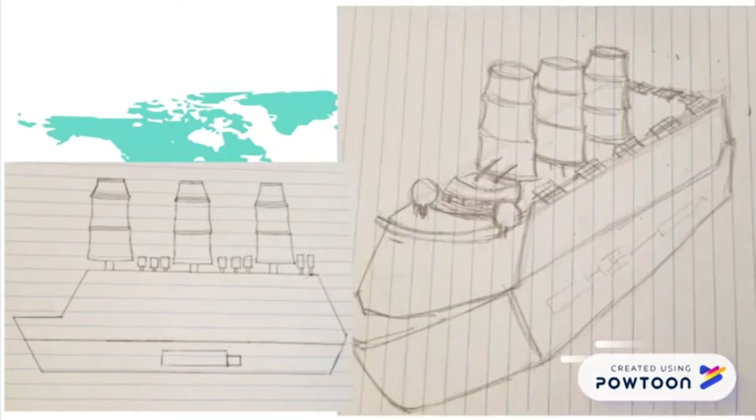Solar energy, wind power, and biofuel are more likely to replace the heavy fuel oil in cruises. As wind and sunlight can be obtained from nature during the journey, electricity can be generated by wind turbines while solar energy can be stored in a photovoltaic system.

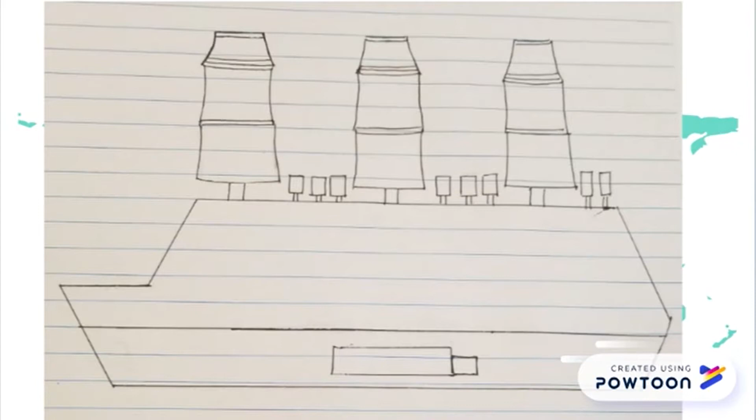And the first one is wind energy. We do not use the wind energy to convert into electricity - we directly use the wind direction to produce thrust.

This is a design similar to the B9 cargo ships that use a 20 meter by 50 meter high rig system to maximize the wind power to produce propulsion. This is designed by the University of Tokyo and invested in by merchants and some potential investors, which is also proved by experts and professionals about its efficiency and incentives.

Furthermore, it also proves our installation of the rig system using wind energy. As our design is taking reference from the B9 cargo ships, we should examine our design by calculating some data. The average capacity of the B9 cargo ships is about 200,000 to 300,000 tons.

Also, for the common cruise, the average capacity is about 220,000 tons. So in conclusion, the wind energy of the cargo ships can be applied to our RE 1.0 cruise.

With 80,000 gallons of average consumption per day, as we know, 60% of energy is covered by the wind power. So if we calculate the oil saved per day for ships, we get the answer of 48,000 gallons.

And there are totally 314 cruises in the world, and we can assume there are 20 cruises operating a day. So if we calculate the total amount of oil saved per day, we get 960,000 gallons, which is a very massive number.

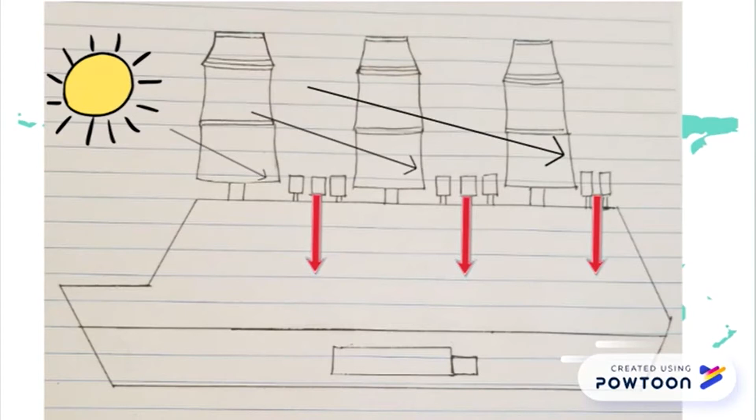We would also like to apply solar energy to our design. In daytime, the solar energy is converted into electricity and stored in batteries. At night, we can directly use the electrical energy stored in daytime to support the ship operation.

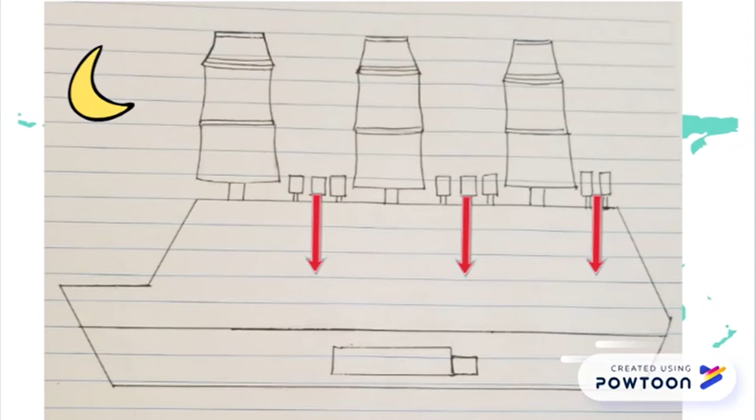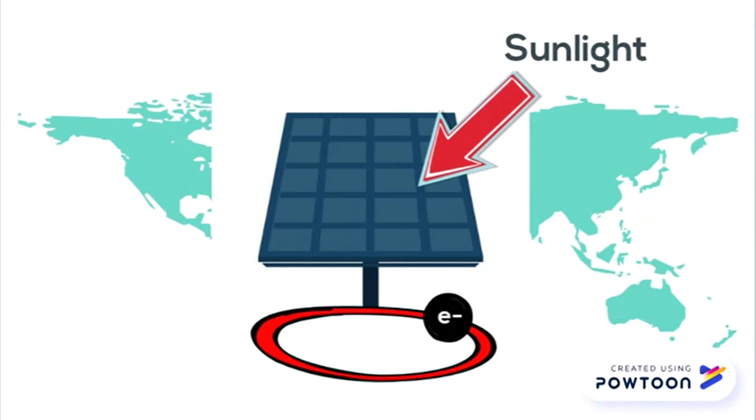You may ask, how do solar panels work? When sunlight shines on the panel, electrons are emitted, resulting in the photoelectric effect.

Now let's move on to the data of efficiency of solar panels. At mid-20th century, only 4 to 6% of solar energy is converted to electrical energy. So what is the electricity demand of cruise? We find that the power for supporting the whole cruise is 60 to 70 megawatts. 1/3 is used for propulsion, and the remaining is for other usage, which is 40 to 47 megawatts.

But what is the amount of solar panels we need actually? A general size of solar panels is 1.635 meters square, with a solar constant of 1.36. The energy demanded of cruises is 40 to 47 megawatts.

By applying this equation, we can see that a total of 78,250 solar panels are required, and it is not feasible for us to install all standard solar panels on the roof.

In economic aspect, the cost of solar panels per watt is $17.203. Hence, the total installation cost will be more than 700 million, which is impossible for us to afford.

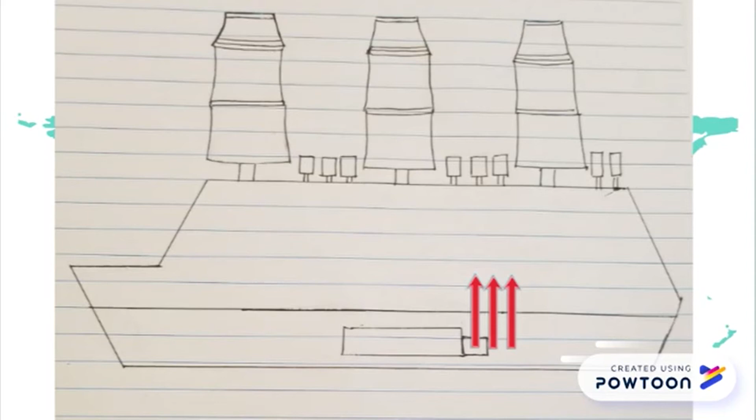Generally, we get 40% of the ingredients we turn into the waste, and we get the huge number of passengers and also the many places for serving the dish. The massive food waste is produced, which refers to it has a great potential to generate biogas.

So what is the relation between the food waste and the biogas? How is biogas generated from the food waste? First, we have to prepare some input materials and do the fermentation, which consists of the following 4 processes.

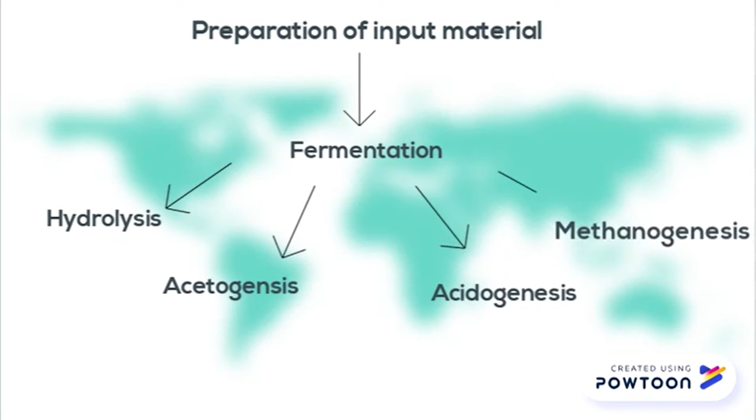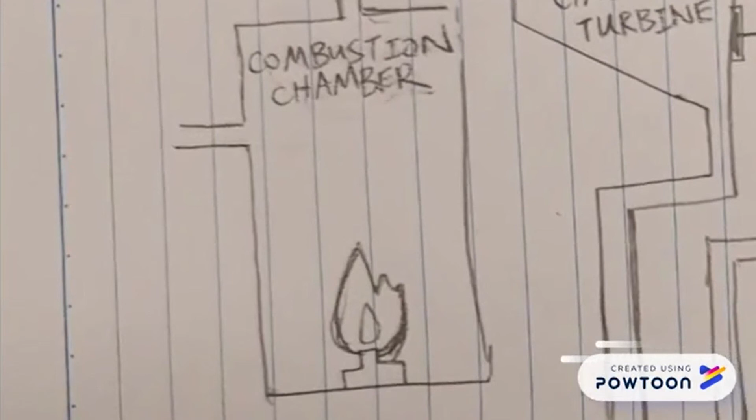Then, how is biogas related to electricity? What is the efficiency? First, when we go to the combustion chamber, the first step is pumping in some biogas. Then, by heating the gas, it can raise the molecular kinetics.

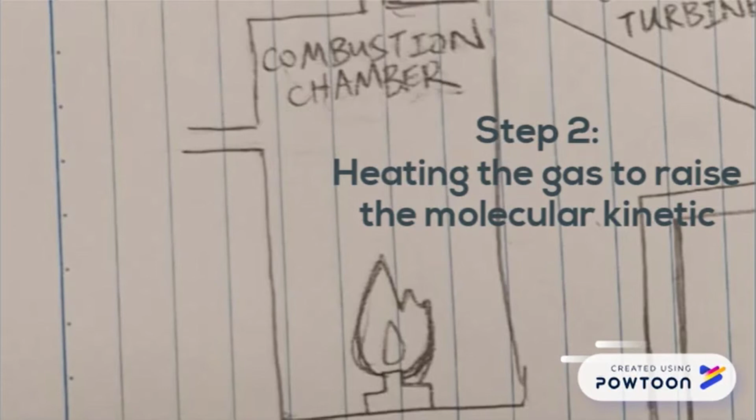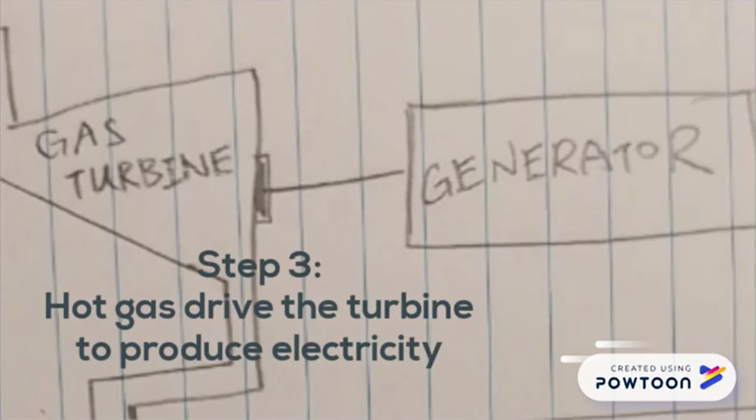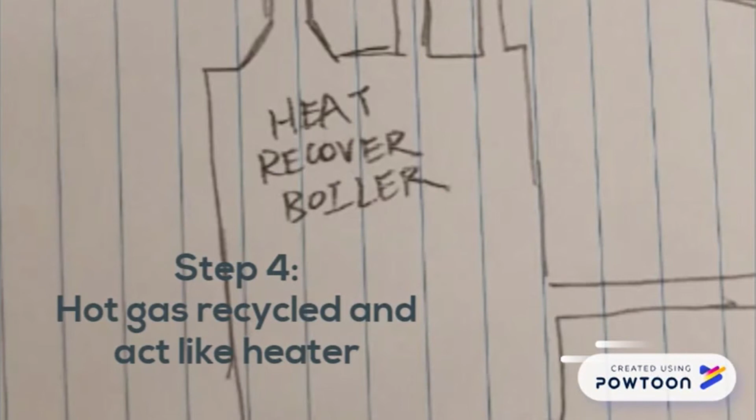The third step is the hot gas driving the turbine to produce kinetic energy, which converts into electricity. The fourth step is the hot gas, which is recycled and acts like a heater heating the water.

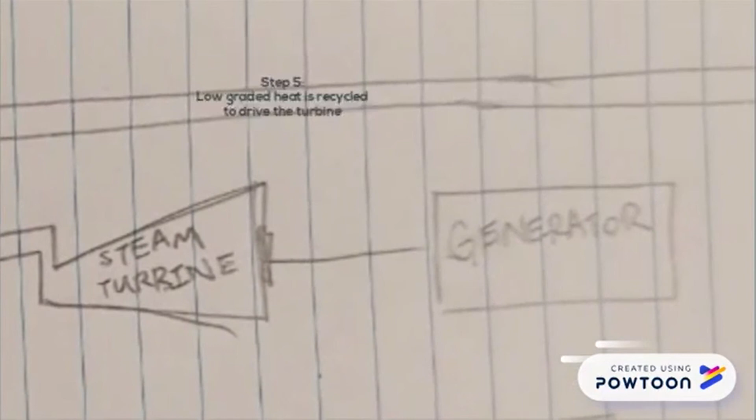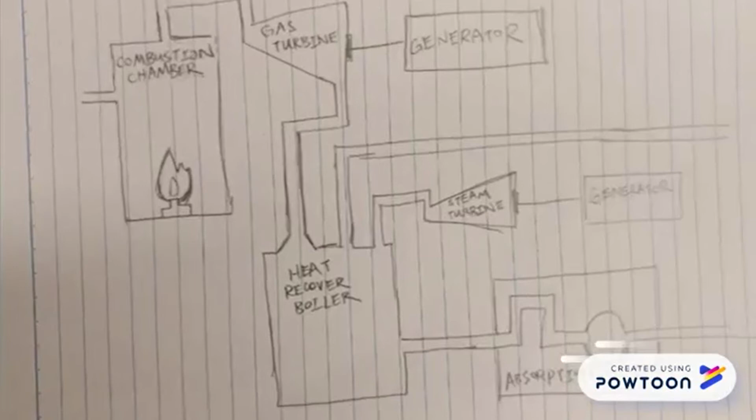To maximize the efficiency, some low-grade heat is recycled to drive the other turbine in the other stream to produce more electricity. The last step is some heat is used to drive the absorption chiller, which is for our air conditioner.

As mentioned above, the energy demanded is about 40 to 46.7 megawatt, and we get the calorific value of 6 kilowatt-hour per meter cube, and the average sailing time is about a week. Then we can get the volume of gas demanded by the following formula.

As mentioned above, the energy demanded for the propulsion is about 20 to 23.3 megawatt, and wind can cover 60% of the thrust. We can calculate the volume of gas demanded by the following formulas and get the answer of 67,200 meter cube. By summing up, we can get the total biogas demanded of 2.042 times 10 to the power 6 meter cube.

How can we ensure the stability of the fuel input? Are we going to rely on different kinds of fuels? But is it enough if we only depend on them?

During the departure of the cruise at the pier, it is already charged up with sufficient biofuel, which is around 2 million meter cubic. By making use of the massive food waste of cruise, we can generate biofuel to refuel the consumed fuel during the journey, which enables stable supply of fuel.

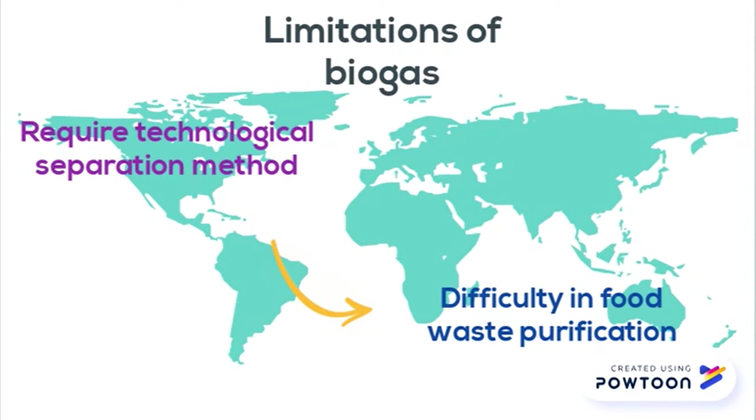However, solutions for all these limitations are very well known and have been developing day by day. Therefore, in 10 years, renewable energy technology for the cruise will be successfully commercialized.

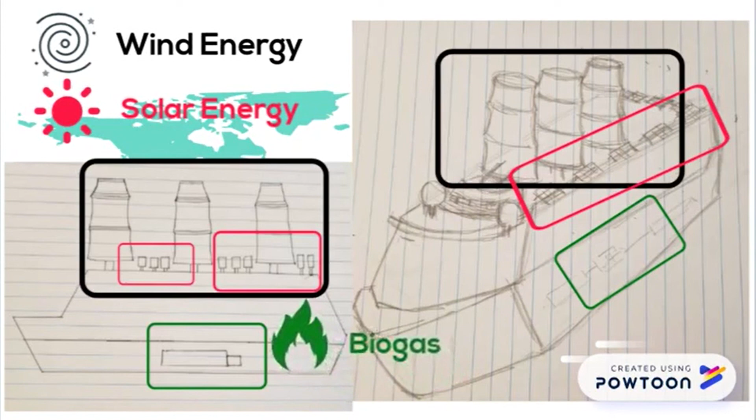Lastly, this is the conclusion for our design. Out of the 3 types of renewable energy, we decide to eliminate solar energy and keep the remaining, as it will be more suitable and economical.

But how does it work? We'll use wind as the main energy supply for propulsion, which is around 60%, while the biogas will be responsible for the remaining 40% and as the electrical supply for different activities in the cruise.